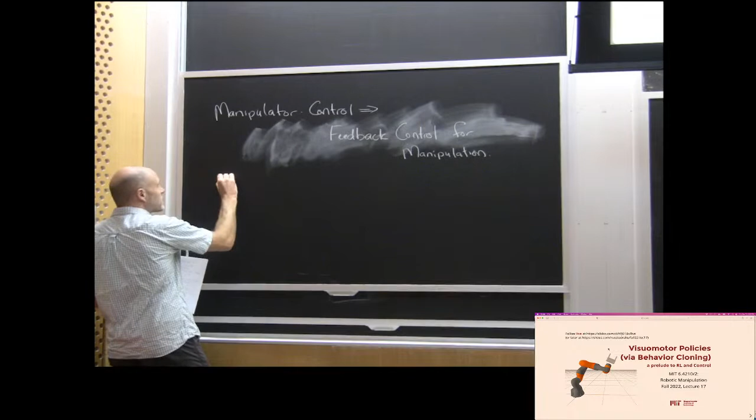And let me make sure that distinction is clear, because it looks like the same words. Let me make sure my intent is clear, even if you might recommend some better words for it. When we were talking about manipulator control, this was only controlling the robot. And that was important, right? That made a lot of things a lot easier.

Remember, the reason I call it manipulator control is it leans so heavily on the manipulator equations, which was just my mass times acceleration equals the sum of the forces, which looked like M(q) v dot. It has a particular form in the manipulator equations,

but something like this, okay? Where this was the mass times acceleration terms, this is gravity force, this was maybe damping or friction or other things. Importantly, this was my torque input. These were maybe my contact forces or other applied forces that were described in a Cartesian frame. Okay, and we worked with those equations a bunch last time. So I hope you see that as mass times acceleration is the sum of the forces.

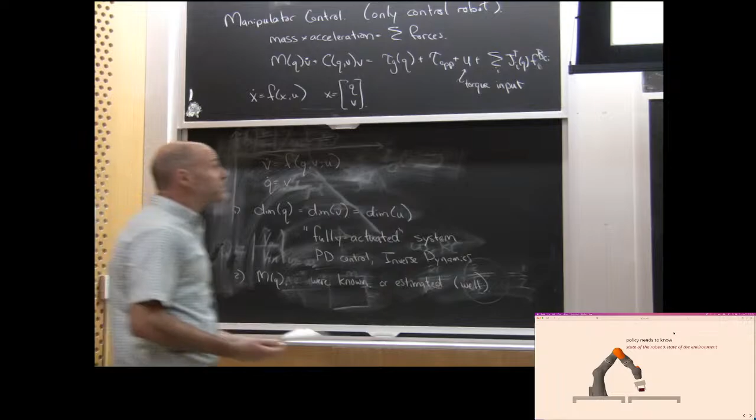Right, so the bigger problem is to not just control the state of the robot, but to control the state of the robot and, more importantly, the state of the world. And a lot of those assumptions that were fundamental in the way we wrote our controllers become no longer true. And I want to spend a little time talking about the ways that those are not true and the ways that those complicate control.

Okay, so whereas before we had X was, let me just say Q robot, maybe, and V robot was our state before. Now we're going to have at least something that has, in that example, the state of the brick in the state space. But unfortunately, our U is still just U robot. I picked up more degrees of freedom that I'm trying to control, but I didn't actually pick up more actuators by which to control it.

Okay, so that is now another differential equation, which I could write as my same sort of V dot is F of Q, V, U. It's still a differential equation in all of those, but the dimension of Q is now strictly greater than the dimension of U, and that makes control a lot more interesting, a lot harder. So that's where you come into underactuated systems.

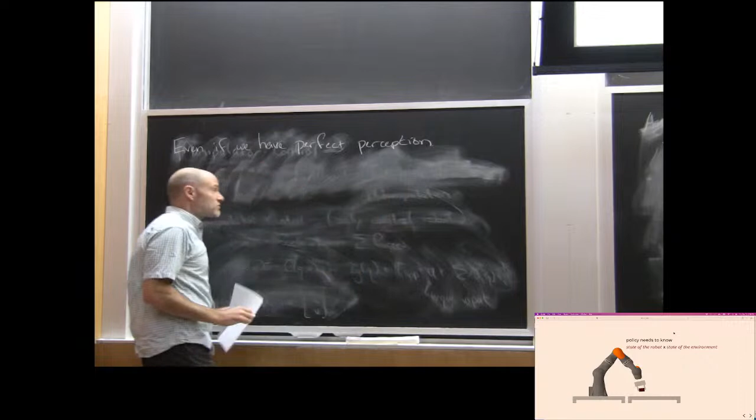So even if we assume perfect perception, so let's ignore the perception problem for a second. So let's say that I have a perception system that's reading my cameras or whatever, that's outputting some estimate of my state. And perfect perception for me means that x hat is just outputting x directly. In simulation, we could just be using the cheat port and asking multibody, what is the true state? Okay. So still the problem is rich because it's underactuated.

But also because, if you look at the equations, U on the robot is what you get to control. Your goal is to control, let's say, Q brick. If you look at the way those equations come together, the only way that U gets over to control Q is through the contact forces. The equations of motion are, in some sense, decoupled. They're only coupled through the contact forces. So you have to do the control through the contact forces.

Okay, so when I do write the equations of motion for that robot plus brick system, it actually still looks like the manipulator equations. Those equations are still valid. But there's an extra set of equations, let me put a little b underneath all of these. There's a new set of equations for the brick variables. You can write force equals mass times acceleration for this too. You have the gravity of the brick. B is for brick, okay?

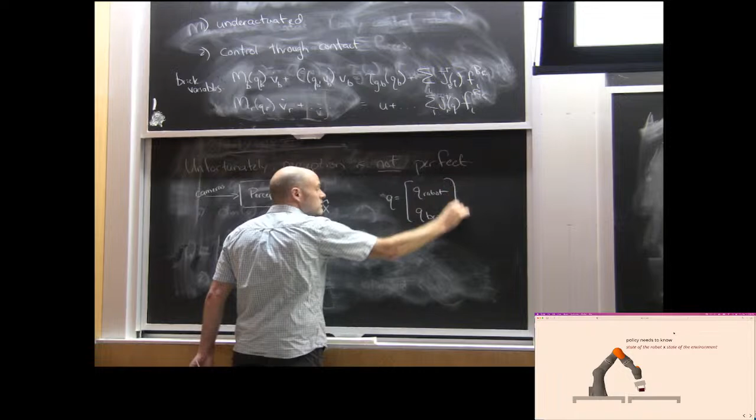Right? So if I think about the role of my perception system that's taking, let's say, cameras in, even if I'm trying to estimate the state of both the robot and the brick, right? The way that the perception systems make errors is pretty non-trivial, and you've seen that already. You've seen, for instance, ICP works spectacularly well, and then it doesn't. It's not that it's a little bit off, but it would just give you complete garbage on one frame, right? If it loses track, for instance.

And that's true of many camera-based perception systems. They can often work spectacularly well, but then fail catastrophically. So in a lot of our traditional controls, you might try to say that this variable has Gaussian noise on it or something like that. And you could think about this as part of a Kalman filter framework, if you know that. Okay, but perception systems make very non-Gaussian types of errors.

In particular, if you have a linear Gaussian system, if my equations happened to be linear and my noise happened to be Gaussian—those are not linear equations, those are nonlinear equations, and hidden inside there's sines and cosines and the like, right? They're not linear. But if the system was Gaussian, then I could say that if x hat was just the expected value of x, we're in pretty good shape. And for linear Gaussian you don't actually even need the variance, but maybe the variance of x can be a useful thing to estimate too.

And if I've chosen some representation of my state, x, and written a probability distribution over x, I may or may not have gotten the right state, right? So even p of x might not capture the true state. And I actually mean this in a deep and important way. I'm not trying to be flippant about it, right? I think most of the control theory that we've done has assumed that we know at least what the state representation is.

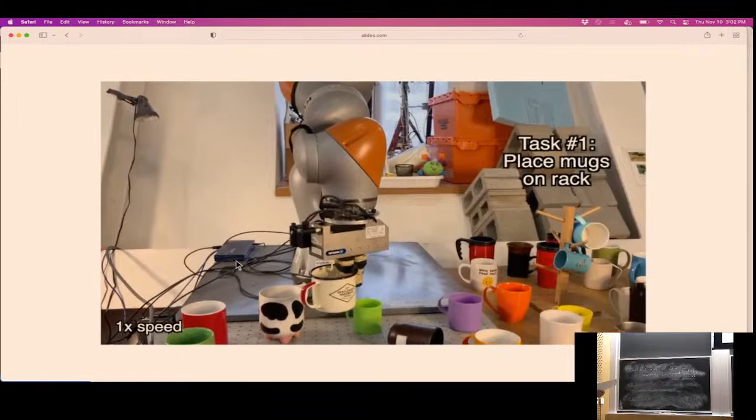That you know that, for instance, the joint angles of my robot, the joint velocities of my robot, the quaternion plus translation that specifies the pose of the brick plus its spatial velocities, that is the right state. And if I write a distribution over state and solve that, then I've somehow solved the problem. But that broke down when we started thinking about category level manipulation, right? As soon as you say you have uncertainty about the geometry of the object, where does the uncertainty about the geometry fit in x if I just had x being the positions and velocities, right? So x somehow needs to encode uncertainty about geometry.

Maybe even uncertainty about the mass. Not for that particular type of task. You didn't need to know the mass, you just needed to know the geometry, really. But certainly there are tasks like the force-controlled tasks we talked about where the mass estimates are important and the like, right?

And this is, I think, maybe one of the biggest things that we've done. We've railroaded ourselves a little bit in the sort of classic control for robots. We say, okay, well, we're going to estimate a distribution over the possible joint positions and velocities, world positions and velocities. And we haven't sort of naturally encoded geometry and mass uncertainty and the like.

So people are really excited these days about, let's say, well, maybe I've got an implicit representation of geometry, right? And maybe if I have a NeRF or a signed distance function or something like this, and I can use that in my state representation, then I can somehow write controllers that work for many geometries. And that's a huge, big topic that's hugely important.

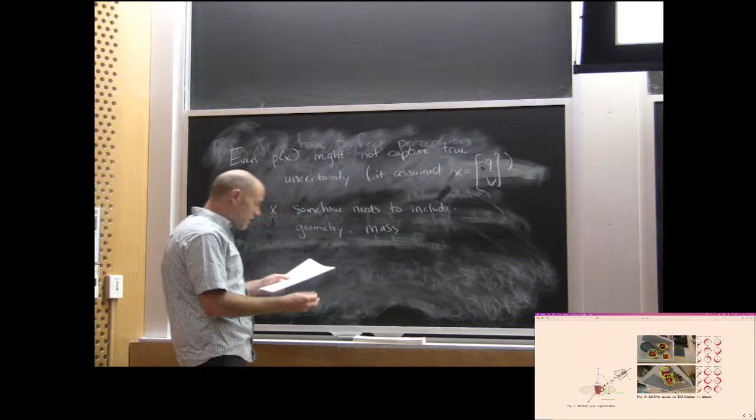Okay, but even that can fail, right? So even if I had a beautiful way to write x with positions, velocities of the robot and the brick, and then I have the geometry included and the mass included, there's still, I have only a handful of examples that I always use, but now what if I'm just doing this? Like, okay, I could write positions and velocities of all the pieces, but the number of pieces is breaking, right? And the contact mechanics, and that's hard stuff.

That's kind of like, if I start writing that down and asking about the dynamics, how they evolve and the state space evolves and stuff, that just kind of breaks down, right? The way we would write that control problem breaks down. It makes my multi-body head explode. This one does too, right? I consider this like a pinnacle of manipulation. We all do it a couple times a day, right? But that's incredible. But what is the state of the shoelace?

Yes. Do you have the answer? That would be amazing. I'm sorry, Rob. Why POMDP? Why not MDP if we have the cameras and we can see this? Okay, great, awesome. So let me come back to that. I'll just do my 3 things, then I'll come back and try to answer that.

So when you get to deformable objects, then suddenly the state representation question gets really rich again too, right? So we use methods from finite elements and stuff. There's ways to represent the state in order to simulate it, of course. But is that the right state to build a controller, right? I always talk about spreading peanut butter on toast. There's a few of them I feel like kind of capture most of the things. What is the state of the peanut butter? That's ridiculous, right? But that task should be very easy.

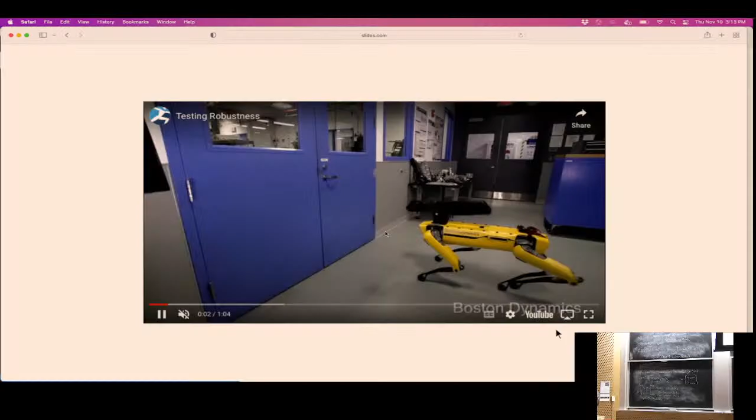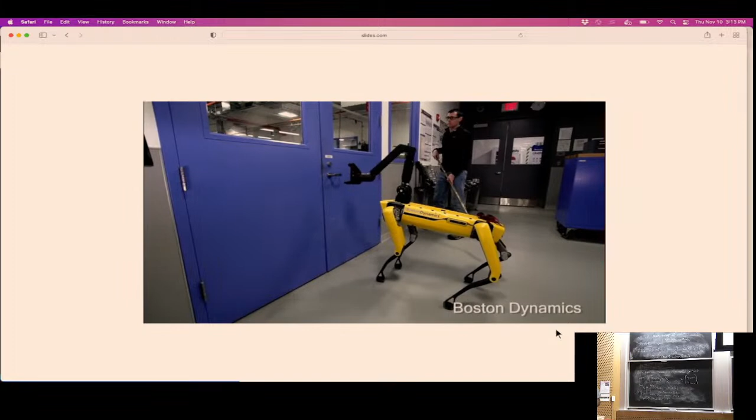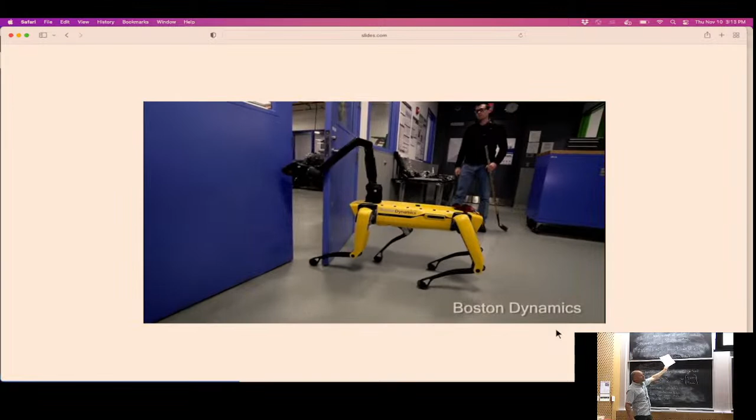Remind us of the controller that was written for this; it is extremely robust. It sort of has a sense that someone could push me with a hockey stick, right? Implicitly. And it's an incredibly good controller. I don't know that it's optimal in any ways, but it's highly functional. And it is not trying to estimate a full belief over the possible environments. It's not trying to estimate with high accuracy the angle of the door handle or the door. It's using a much smaller summary.

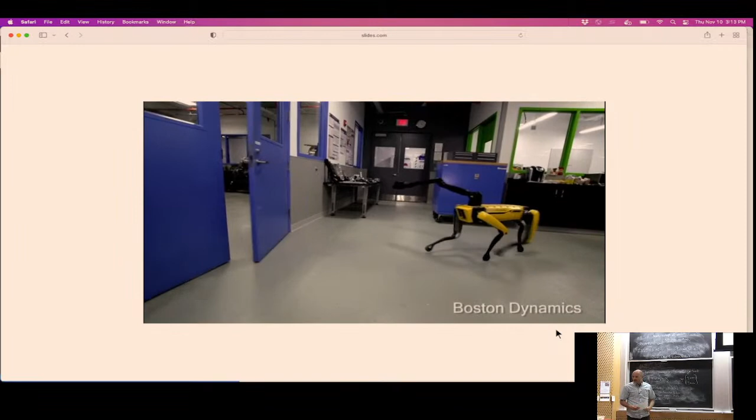Andy and colleagues, I know it's very distracting, wrote a beautiful controller that used the sensors more directly. They didn't try to estimate the full state of the world. And it works really well. So there's some sense, I think, in which that picture makes the problem look too hard.

So the way we want to think about it today, to sort of launch into our further discussion about control, is to go to the other extreme and appreciate that there's another extreme here, which is, what if I just take my plant, I have my observations coming out Y, and I'm going to go directly from Y to U, okay? Even if these are cameras.

And I'll call this output feedback. It's not my name, it's output feedback control, as opposed to state feedback control. Okay? When Y are pixels, camera images, let's say, and U are torques, people like to call it pixels to torques.

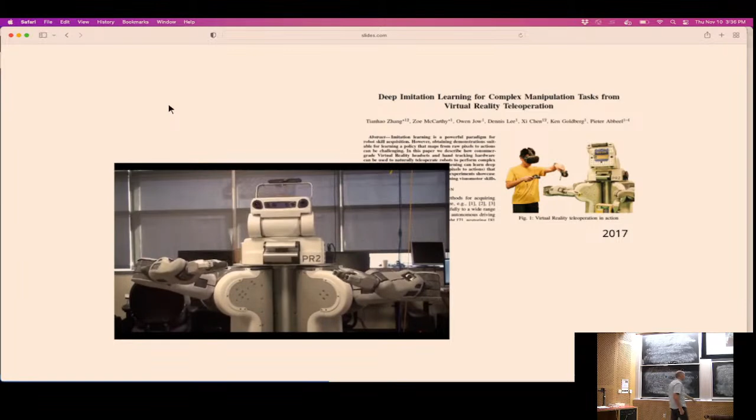So for robots and mobile manipulation, as deep learning started getting good, people started coming up with more and more clever ways to capture humans doing the task. If I watched a human doing this, like on YouTube, if I wanted to watch a human rolling dough, that's a hard problem still to map from a human's controlled torques and a human's real observations into robot actions.

It's much easier if you can get a human to operate the robot. And then you watch directly the torques that are being applied from the human's controller, and maybe if you give the human exactly the inputs that the robot's getting, then now you have exactly the input-output data that goes to the human, and you can try to just turn that into a supervised learning problem. And people have been making cooler and cooler versions of this.

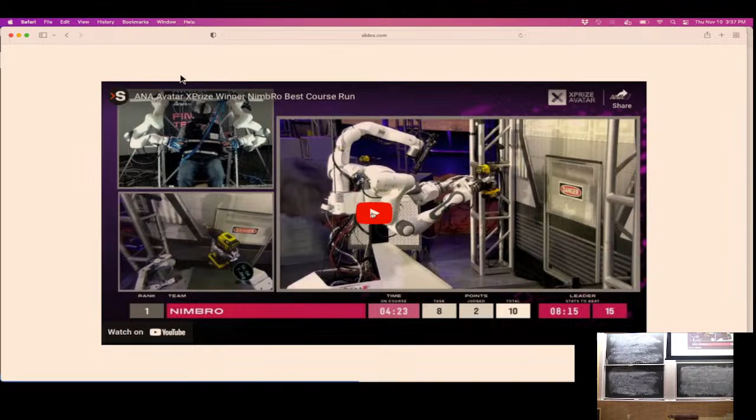How many people know that the Avatar X Prize happened this weekend? Yeah? Right? How cool is that? So just this weekend, so the X Prize is like they make these grand challenges about improving the world, and they picked a robot example this year, and it just happened on Friday and Saturday.

I won't play the whole thing, but the way it worked was they had roboticists that were the judges. This is my friend Jerry Pratt, who's driving. This is the winning company. He was the best driver apparently, and had the system that won by Sven Behnke and company. Okay, so there's this whole mock setup where he had to drive up. He was only given the context of the task by talking to somebody who told him what the rules of the game were. He says, you're going to have to go over here.

You're going to have to pick up the cylinder, and only one of the cylinders is heavy and should be placed on this other spot, right? So you have to actually use your force feedback through the avatar in order to know how to complete the task. There was another one where you're going to pick up some moon rocks or something, and one of them has a particular texture. And you have to put the one with the particular texture over here. And there was a series of pretty complicated things.

And I'll forward a bit. He talked for a long time, I guess. Have you ever noticed it's pretty quick on the commute? That was the HOV lane, so they got right through. Probably turn that guy off, yeah.

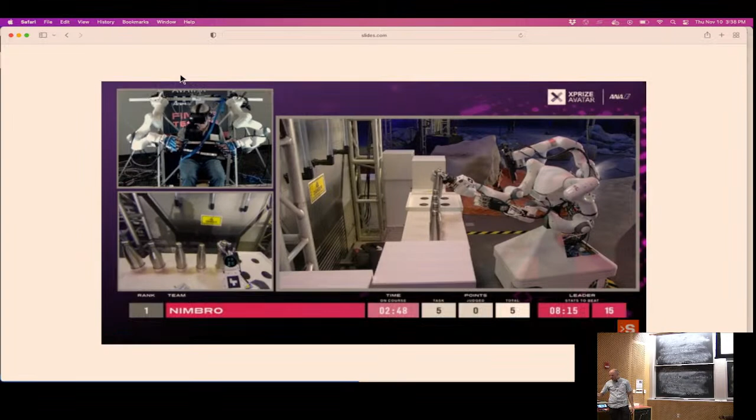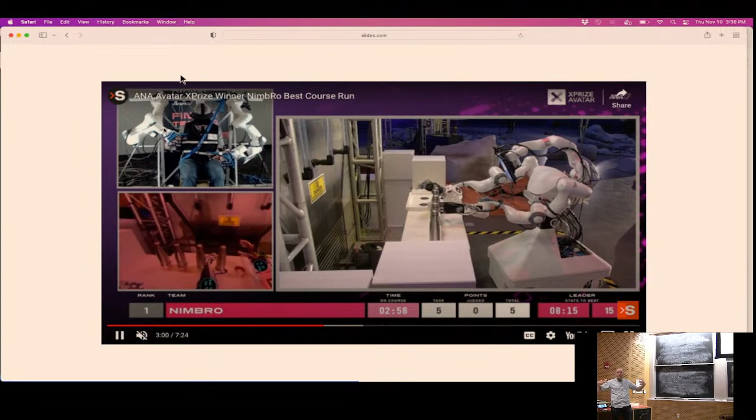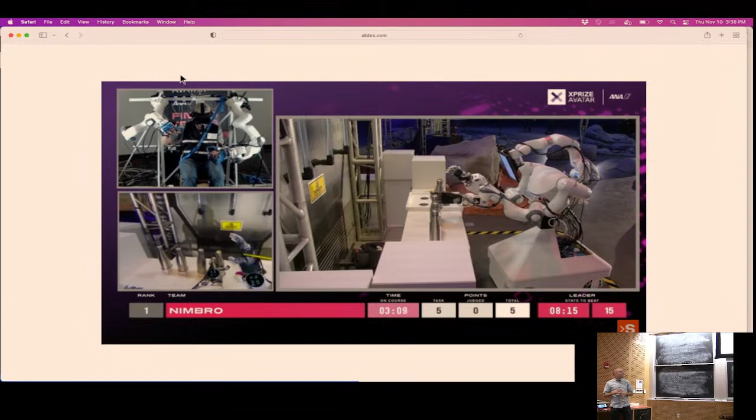So this is the one where he had to pick up something that was a particular weight, and that one was too light, so he threw it away. Okay. Now he picks up the next one, but he's driving. These are actually just two Panda robots that are in kind of like gravity comp mode, so they can be used like a teach mode. And he's got an exoskeleton hand, and he's driving this thing around and doing super complicated tasks, right, with force feedback, haptic feedback.

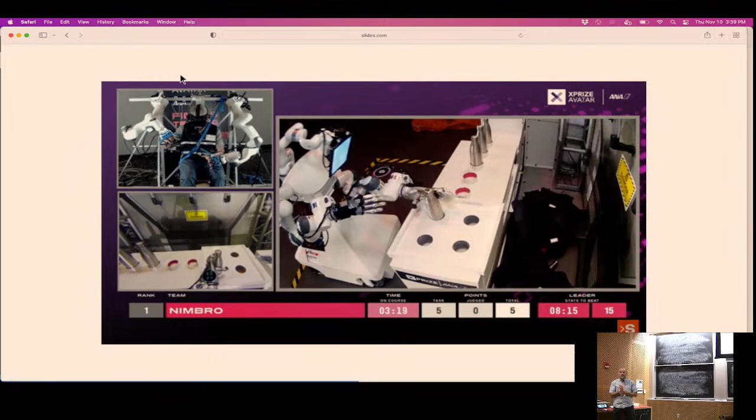And he completed the entire course. I don't think they were sure that anybody was going to complete the entire course, but he did, and they did extremely well. So you should go back and watch the long version of that.

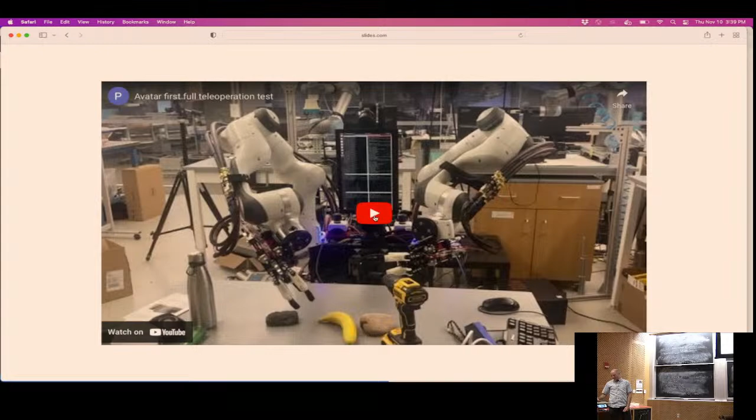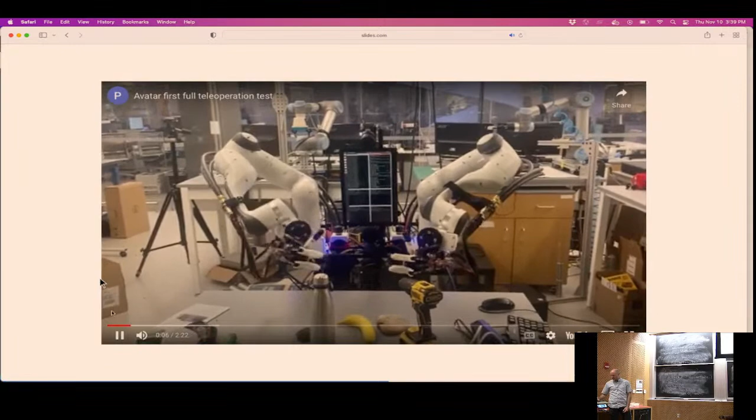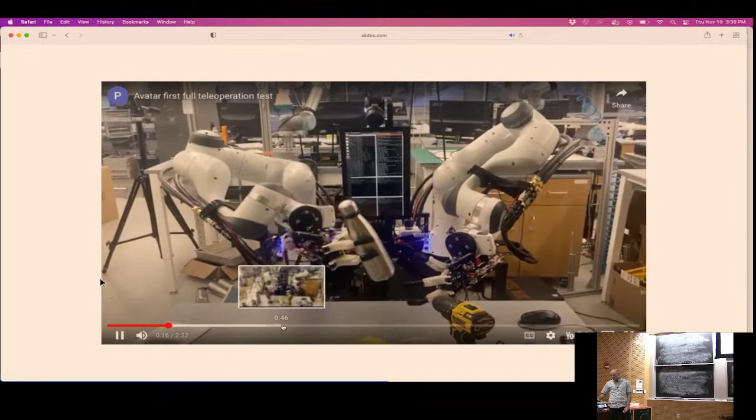One of them that I really like, there was actually an entry by Northeastern that came in third, Northeastern just across the river. They had this awesome setup with a dexterous hand here. And this is in their lab, but they did very well in the competition too. Similar things, pick up the heavy thermos. He's able to do all kinds of stuff. He shakes hands.

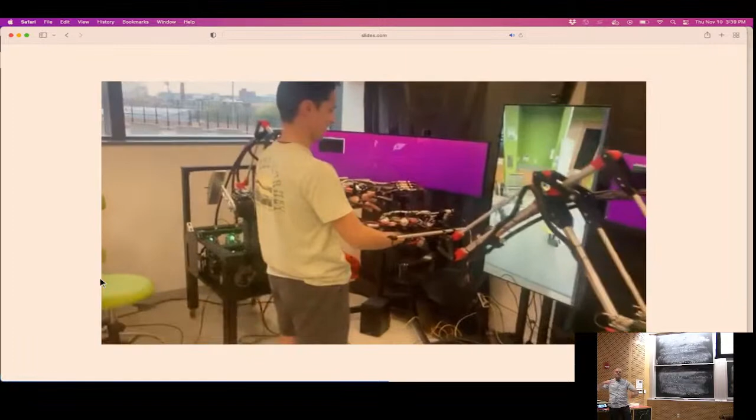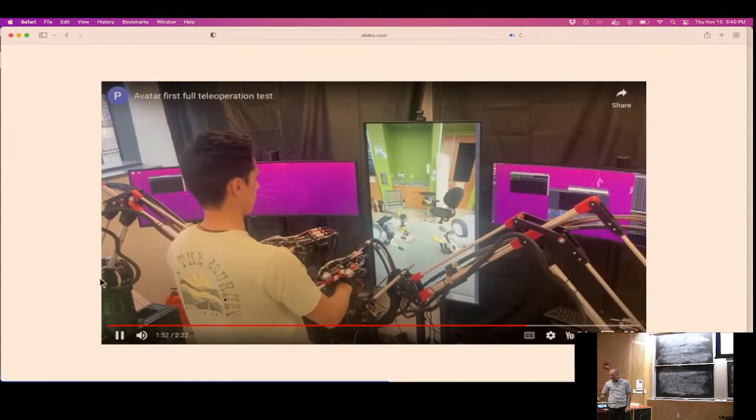Okay, yeah, shakes hands. And off to the side, this is what it looks like, right? He's seeing through the robot eyes and wearing this cool exoskeleton. It's awesome, right? I want one of those in my lab. They're super cool. If we have time at the end, I'll show you my version, not as cool. But you can use it on Deepnote.

It's crowdsourced teleoperation, which is a thing, by the way. People have started companies saying, we're just going to crowdsource teleop and learn how to control your factories, for instance. I think that's a super interesting business model.

Okay, so let me tell you a little bit about how you would architect that visual motor policy and how you'd do some of this behavior cloning. There's kind of a canonical architecture for these things. You tend to have two components. You have your image coming in, and you have some big deep network, like a ResNet, something pre-trained on ImageNet, for instance, that is good at going from pixels through millions of units into some other representation. And there's a lot of different choices for how you pick the output representation.

We've talked a bit about the rise of self-supervised learning as a way to train a feature representation Z. You could just look at objects from two different angles and label them to be the same, and that can self-supervise a network to represent something important about the scene. But your choice of Z, that's where all the interesting work is. People are asking, what is the right Z for manipulation?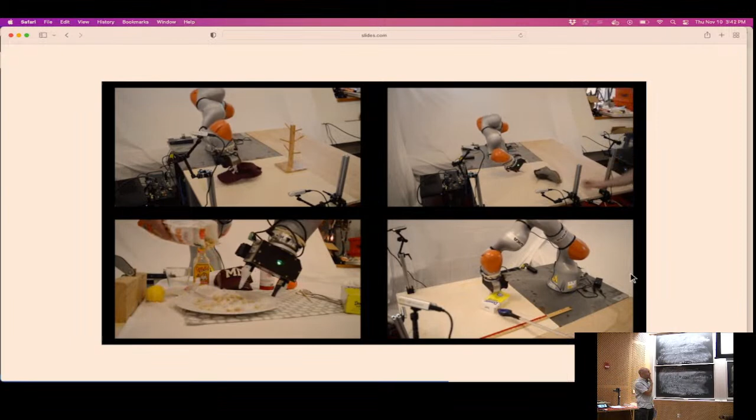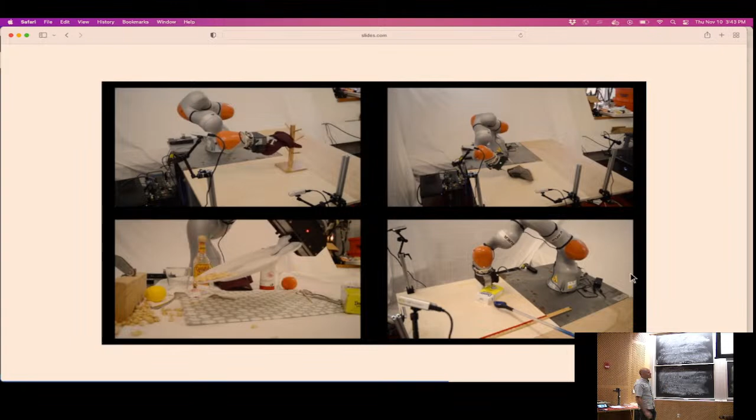That is the architecture that did the kind of stuff I showed you early on. This was an imitation learning pipeline that made super rich visual motor policies for doing things like putting hats on a rack, picking up plates, pushing sugar boxes. This was the first one we had done. Other people had been doing visual motor stuff, but this is the one that really convinced me I had to do it ourselves.

But the robustness that you get out of a demo like that, compared to things that are estimating the location of the sugar box, which tends to work only when you don't have occlusions, and then maybe you make a long-term plan and you execute. This is using high-rate feedback from the cameras, trained with imitation learning, which everybody thinks is an initial startup thing, but now some people would say it's a long-term answer. But when you're in the lab and you're pushing the shoe, and it's pushing back, it's so compelling.

It is so much more compelling than the things we've done before, right? Where if someone came up and moved the shoe, the robot would still pick up where the shoe used to be, and then it would go through the entire task and drop off the shoe, and everybody's there like, the shoe is still on the table. The airball robot videos are less with this.

Yes? Why is it that everyone is using such small networks for the control side? They seem to be enough. So the question was, why are people using such small networks? I think in reinforcement learning, that was a choice made early, and the computational cost of getting enough samples to train a bigger policy network might be significant. So if you can get away with a small network, and people have now seen that those small networks are very capable, there hasn't been a huge push to make them bigger.

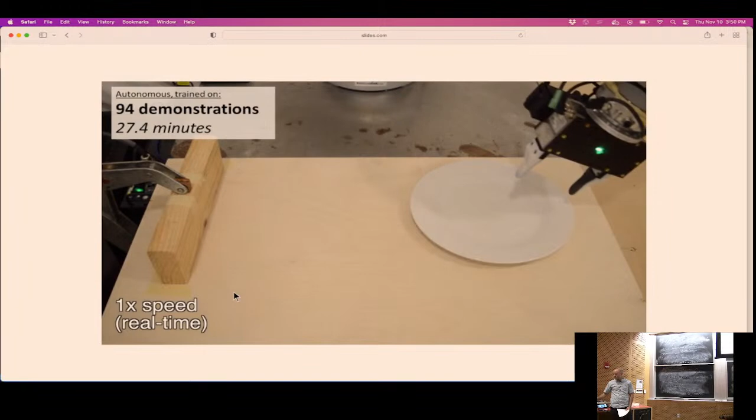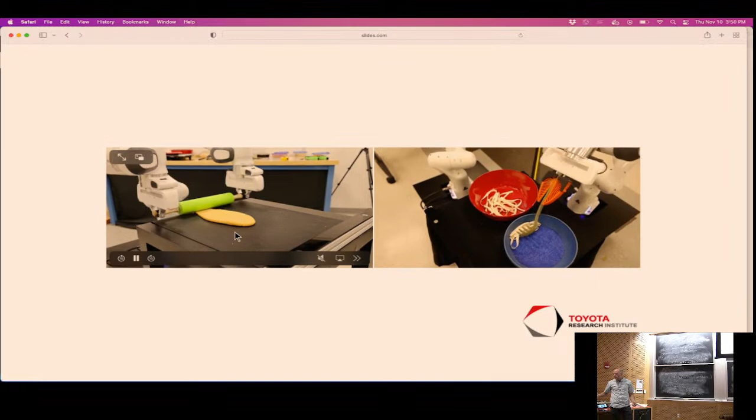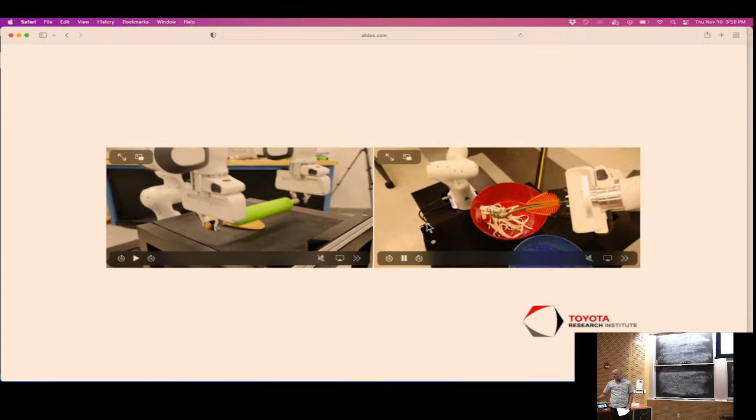And this is how we do dough rolling, for instance, at TRI. And these are places where a few years ago, I wouldn't have even had an answer to the question of what's the state representation for dough? How would I write a feedback controller for dough? Okay, or for noodles. We haven't done peanut butter yet, but we did do sauce spreading.

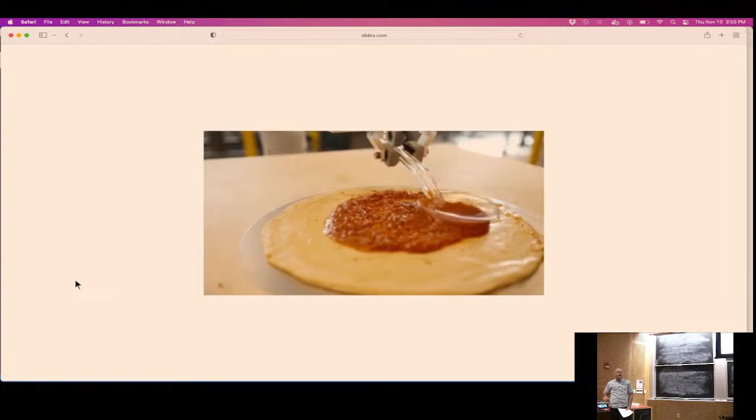Again, this is kind of the peanut butter, right? This is apparently how real chefs spread sauce. It looked a little weird to me, but we actually studied some chefs and then did it. This is work by Siyuan Feng at TRI. Right, and that's a representational question I wouldn't know how to answer, but we're still getting good controllers out.

It's interesting, this just came out the other day, so I put it in. There's an article by one of the leads at Google Brain for robotics. He's talking about the push and pull between reinforcement learning and behavior cloning. And so BC is behavior cloning. And then BC methods started to get good, really good. These are links to all his papers.

So good that our best manipulation system today uses mostly BC with a sprinkle of reinforcement learning on top to perform high-level action selection. Today, less than 20% of our research investment is on reinforcement learning. The research runway for BC-based methods feels more robust. That's not what people would have predicted, I think, a year ago. Yeah?

Andy Zeng gave a talk here at MIT. You hosted him, right? The whole talk was good, but the second slide just captured this so well. This is imitation learning. He says how to make a rock star behavior cloning demo on a real robot. Okay, these are the steps. First of all, collect your own expert data. Don't trust anybody else to make it perfect, right?

So this is about multimodal demonstrations and some of the subtleties you just asked about. Avoid no action data. That's a weird thing to say. Try not to have anything in your data set where you're not moving, because your robot will get stuck. It seems like something's wrong with our formulation. If I accidentally pause in my demonstration data, everything breaks.

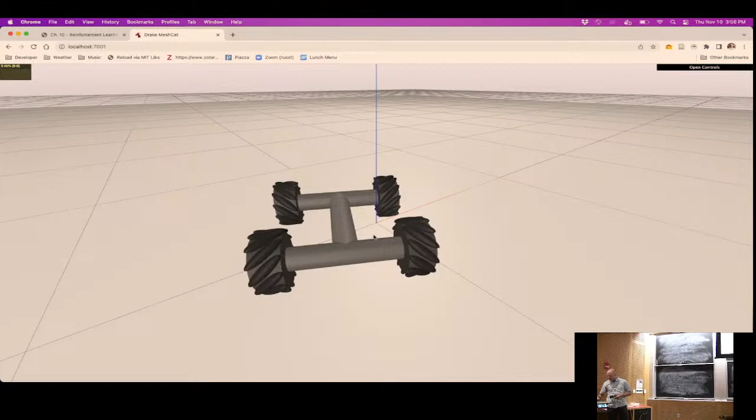So then, of course, after I did that, I thought, oh, I should do the manipulation station. I just added it to the back, so if you want to use this for your projects, I made the manipulation station teleop have one more version. If you have a gamepad, pretty much any gamepad should work, I think. It's a pretty standard interface. Oops, I forgot to press a button. You have to opt in with JavaScript. It won't just read your gamepad without doing anything. So you press the button once.

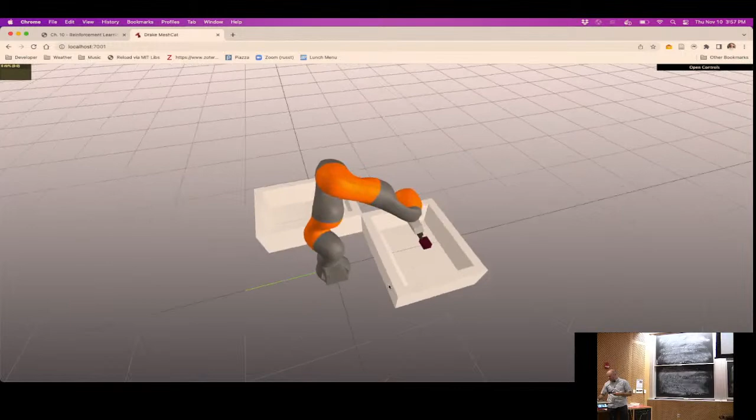Okay, here's the standard manipulation station, and now I can drive it around with my gamepad. There's a bunch of tricks for mapping a gamepad robustly to real commands. I've implemented maybe half of them. I'm really bad at this. I don't know if it's my brain to the gamepad that's bad or the gamepad to the thing, but it's really hard to do. But I can definitely pick up a red brick. It's not that bad. So you guys could use this and make it better, hopefully.

Oh, I missed. All right. Yay! Okay, fun. So not quite as cool as Avatar, but useful maybe?